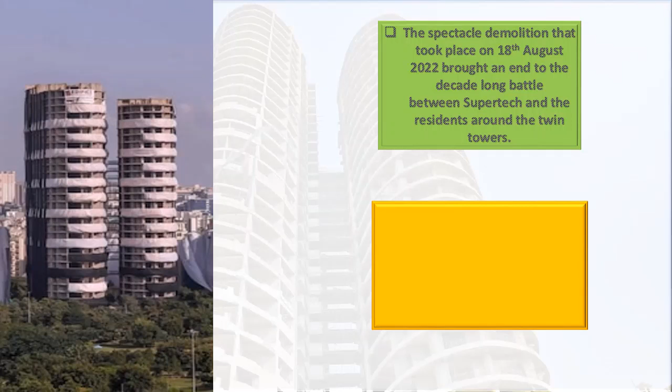The spectacle demolition that took place on 28 August 2022 brought an end to the decade-long battle between SUPERTECH and the residents around the Twin Towers. The SUPERTECH Twin Towers in Noida, also deemed India's tallest building, were demolished on 28 August, Sunday, following a directive from the Supreme Court of India.

Here is a timeline of the SUPERTECH Twin Towers. Timeline, SUPERTECH Twin Towers. The start: Noida-based developmental company SUPERTECH Limited launched the construction of the project known as Emerald Court. The project was started in the mid-2000s. According to real estate websites, the flats now have a valuation between 1 crore rupees to 3 crore rupees.

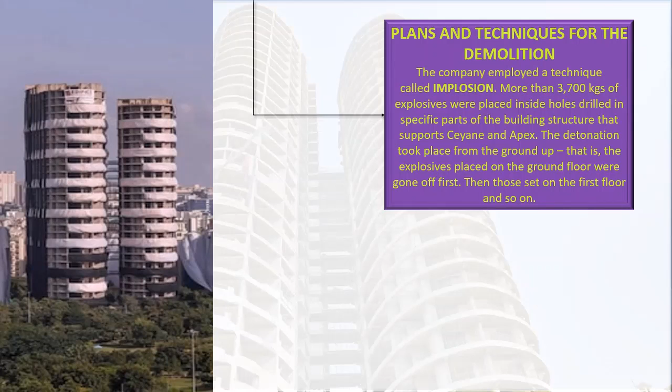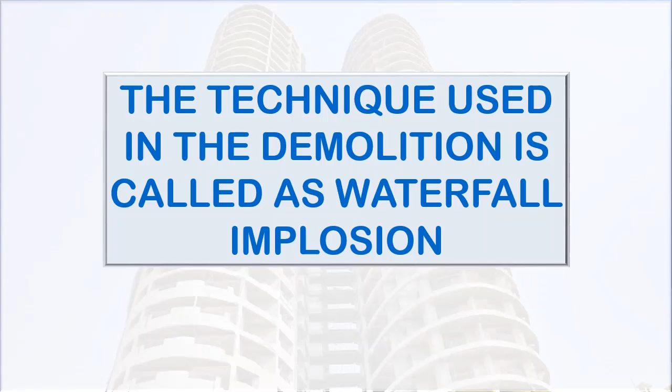Plans and techniques for the demolition. The company employed a technique called implosion. More than 3,700 kgs of explosives were placed inside holes drilled in specific parts of the building structure that supports Ceyane and Apex. The detonation took place from the ground up, that is, the explosives placed on the ground floor went off first, then those set on the first floor, and so on. The technique used in the demolition is called waterfall implosion. Here is a video of the demolition of the Twin Towers, Ceyane and Apex.

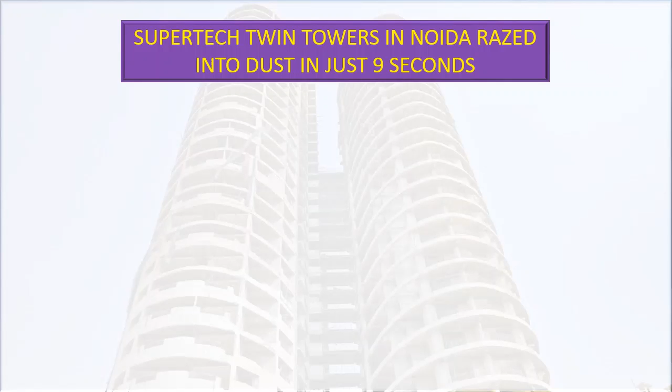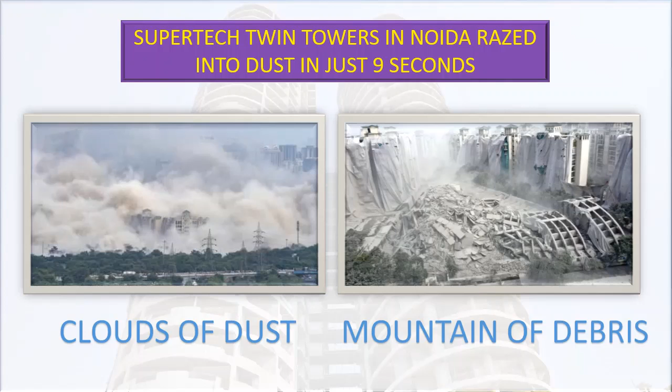SUPERTECH twin towers in Noida razed into dust in just 9 seconds. Clouds of dust, mountain of debris.